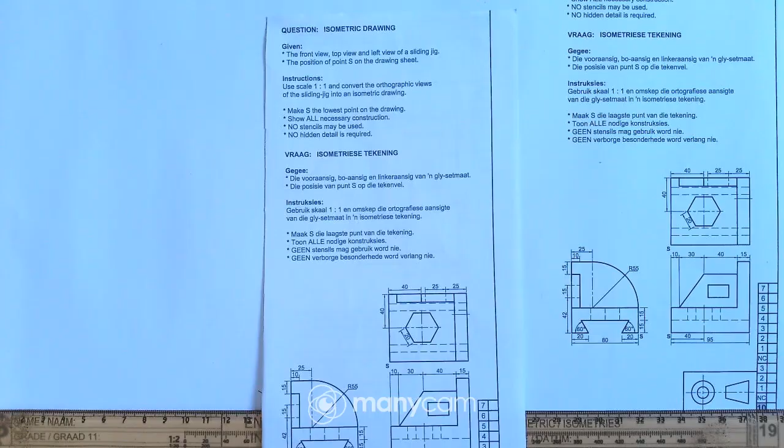In this video I'll answer one of the isometric drawing questions. I took this question from the grade 11 workbook EGD, page 19. As you can see, I have a small piece of paper there, the same as this information section here.

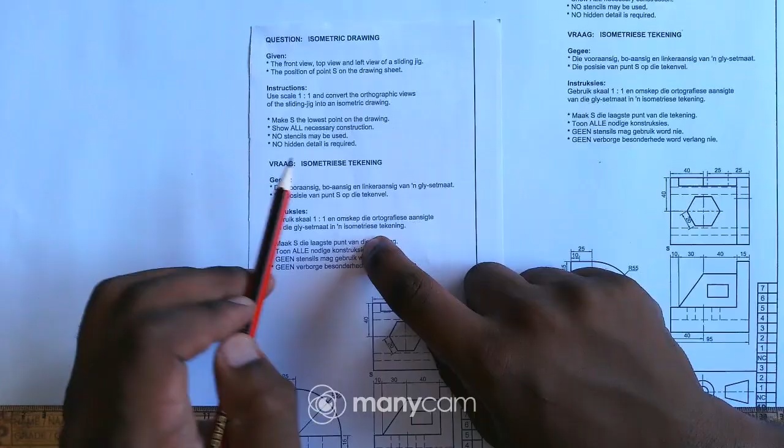I'll start by reading the instructions before I start with my isometric drawing. Given the front view, top view, and left view of a sliding jig, the position of point S on the drawing sheet. Use scale 1:1 and convert the orthographic views of the sliding jig into an isometric drawing. Make S the lowest point on the drawing. Show all necessary construction. No stencils may be used. No hidden detail is required.

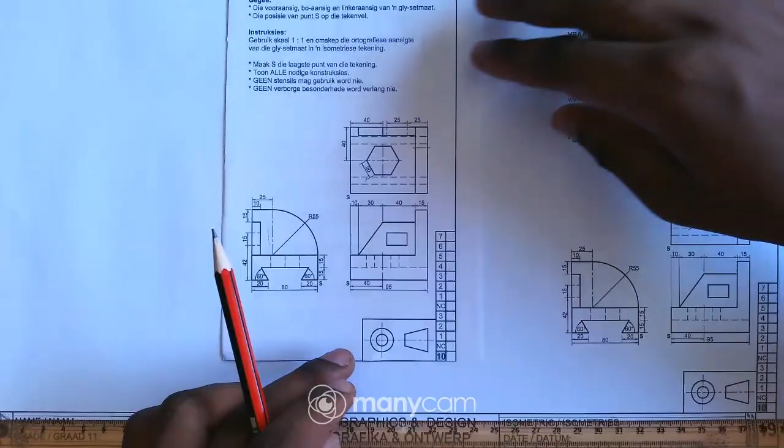As you can see here, we are given the top, front, and left view. So I will start off by drawing the isometric block. In order to draw the isometric block, I'll need the length, width, and height of the object. If you look at the three views, we are given the length, which is 95, and the width, which is 80. But what about the height?

So the height, as you can see from this space here, from here to there it's 30 - 15 plus 15 is 30. But now what about from here to that point there, up there? If you look at this arc, we are given the radius, which is 55. So from here to that line up there, it's 55. So it's 30 plus 55, which is 85. So it means the height of the object is 85.

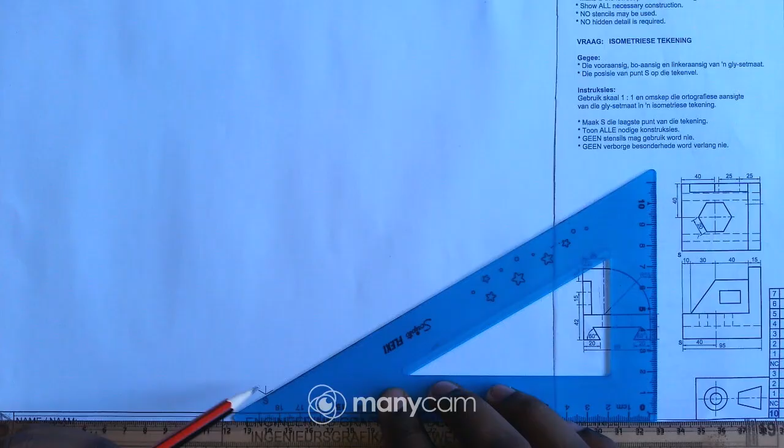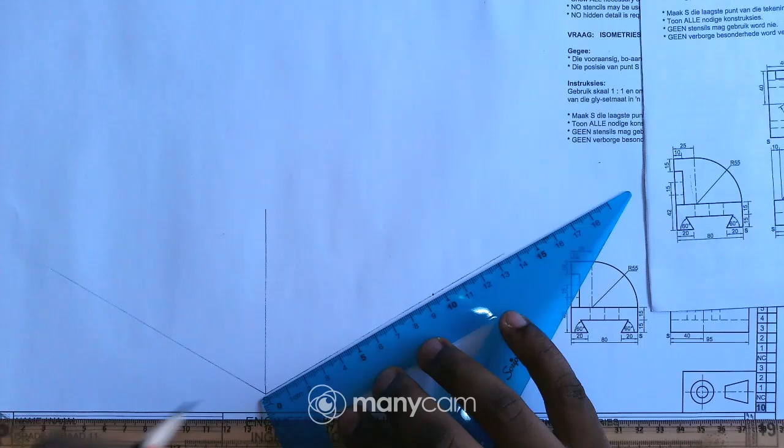So now I can start the isometric block. I'll take my 30 by 60 set square, draw a construction line, and even this side, and the vertical line right there, just like that. What's the length? Remember, it's 95. I'll mark off 95 right there, and the width is 80 to the left.

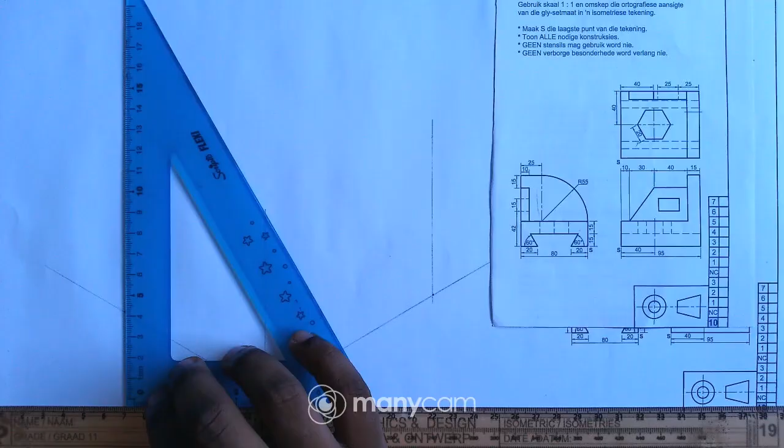And the height is 85, remember. So I'll mark off 85 on this line. From this point I can draw a vertical line and slide my set square to this other point right here. For this point, because this is the height, I have to project this line to the right, project this point again to the left, just like that. For the top part, I slide my set square to this point, draw a line, and on this side do the same thing, draw a line.

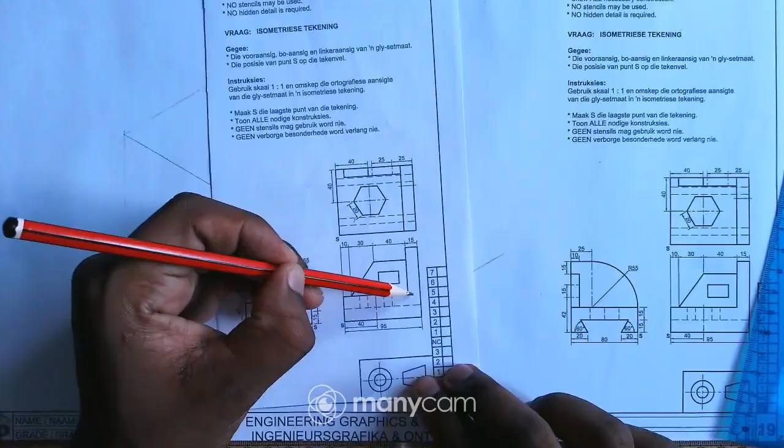So if you look at the screen, I have my isometric block - this section, three sections, this one, and the top section there. The arc obviously is right there from the left view, and when it comes to the front view, where's the arc? The arc is right there. So this is the section for this arc.

So if you look at the front view, obviously point S is right there. It means this part of the arc is far in - it's not right here on this line for point S. So obviously I have to measure this thickness of this section, this part.

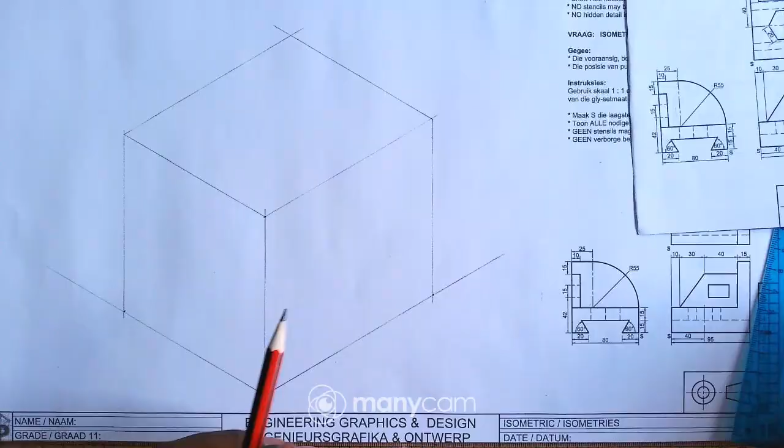So the thickness there, it's 15. I'll measure 15 from anywhere, maybe from this point or this point there. So I'll measure 15 there, then draw a vertical line like that, and draw the line again up there like this. Okay, so this is the thickness of the arc.

So now I want to get this point. If you look at the base, the height of the base - we are given from the left view - it's 30. So from here to there, it's 30. So I can mark off 30 from down here, going up, it's 30.

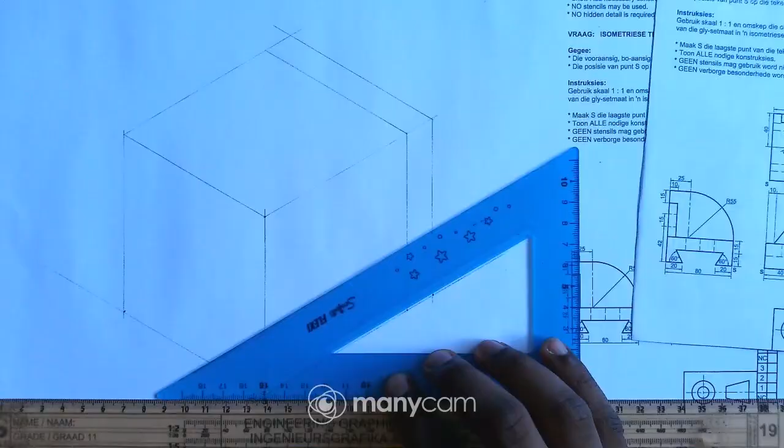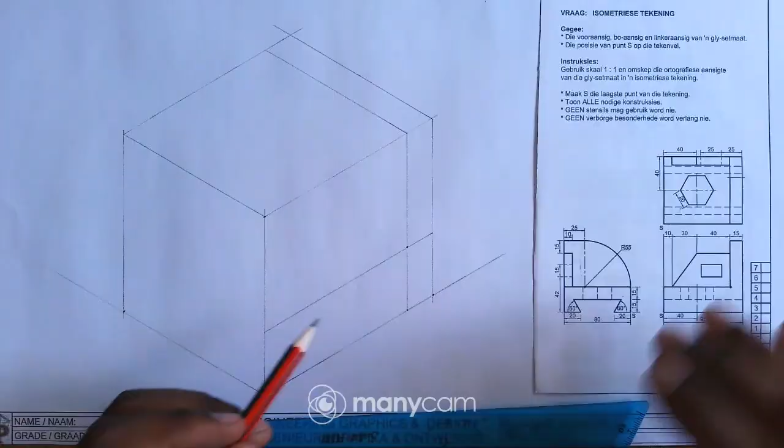Then I draw a line down to this line here. So now I have this point, it's right there - that's where the arc starts. For me to get this center point, I'll measure 55 from this point to the center point there. So obviously I have this point on my drawing, it's this one here. So I'll just draw a line using my 30 by 60 set square.

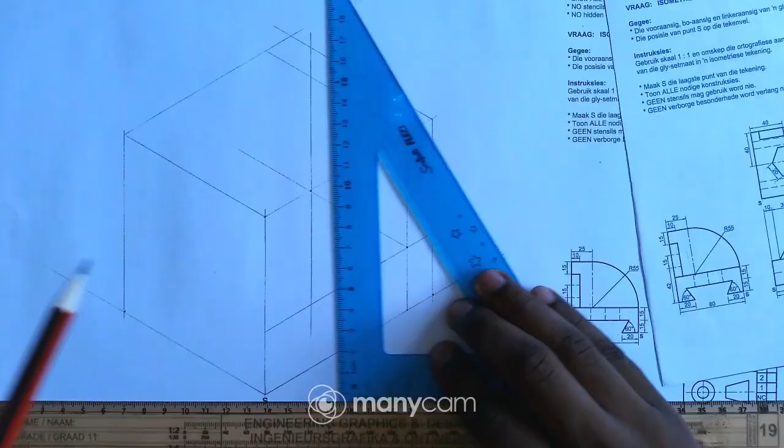And then I measure 55 because the radius is 55. So 55 is right there. It means this is the center point. It's that point right there. So I can just draw a vertical line there, like that. Okay, so obviously this arc, it's right there, somewhere there. I'll draw that arc somewhere there.

Okay, so now I'll have to draw the square so that I can do the constructions for this isometric arc there. Because this is the radius, obviously from here to there it's 55, and from here to there it's 55. So I can just measure. Let me just use my red pen for the square. So from this center point going down, I'll measure 55. I'll measure the radius right there.

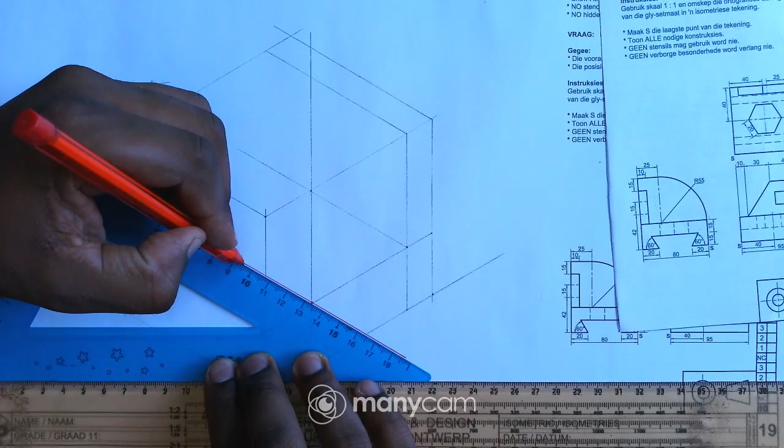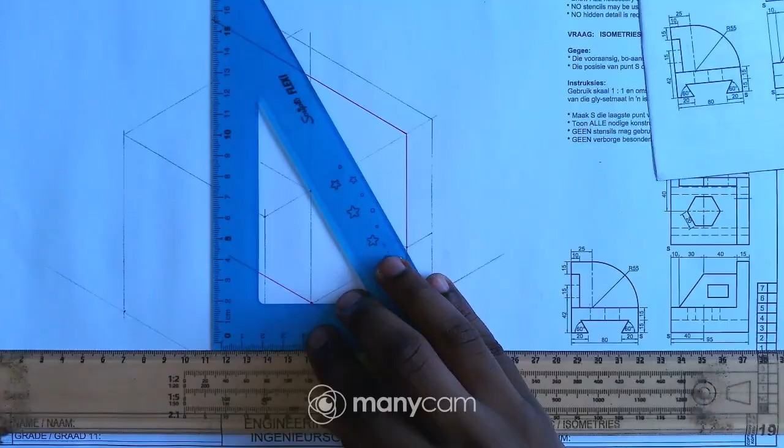So take note that I'm using my red pen to construct the isometric square, and then I'll also draw a vertical line there to this point. Okay, and then even up there, just draw a line going up, and then 55 is right there, and then I take it down. So this is the square. Let me just extend this line. So this is the square for an isometric circle.

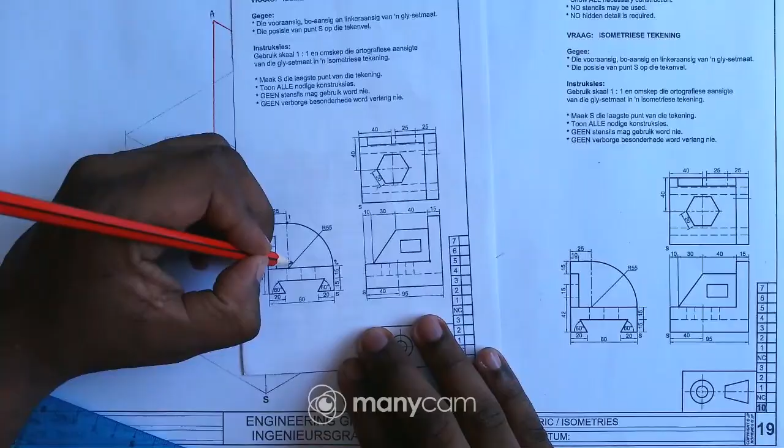So this is the center point. That point is right there, right? Okay. So I can say this is center O. This is A, B, C, D. So I can say this point is 1, this one is 2, and obviously this is the center point, which is O. So if you look at my square right there, where is 1? 1 is right there, 2 is there. Okay, I have center O right there.

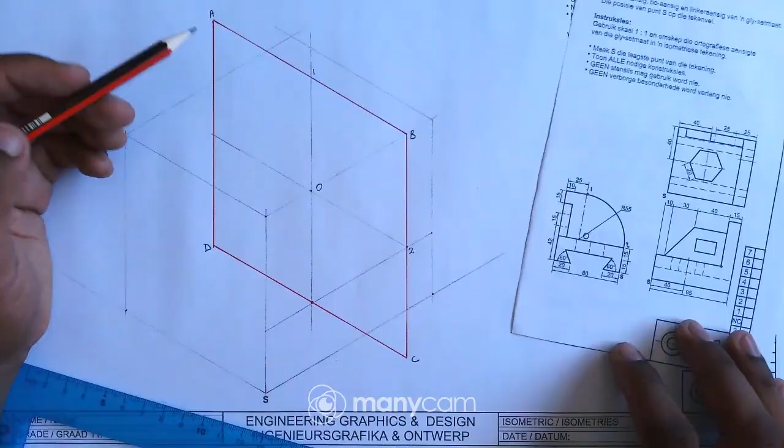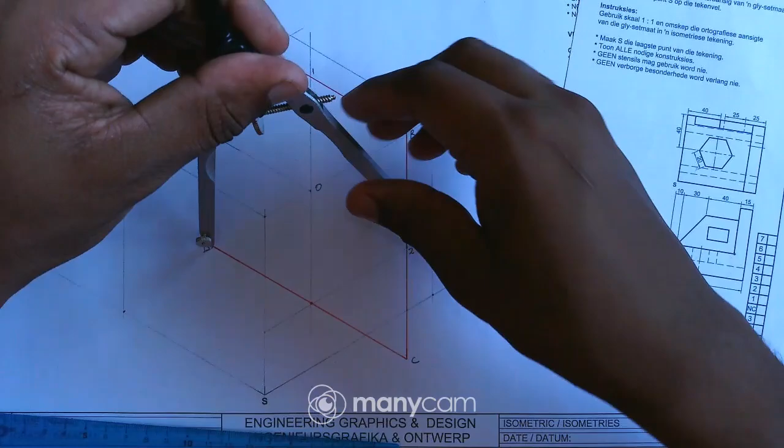The arc is from point 1 to point 2, so it means I'll have to draw an arc from this point to this point. So there is no need for me to make those constructions for an isometric circle. I'll just put my compass at point D and draw that arc there. So I'll just open my compass, put my compass at point D to point 1 right there, and then I'll have to draw. Sorry, my compass just moved. Just like that. Okay, so this is the arc.

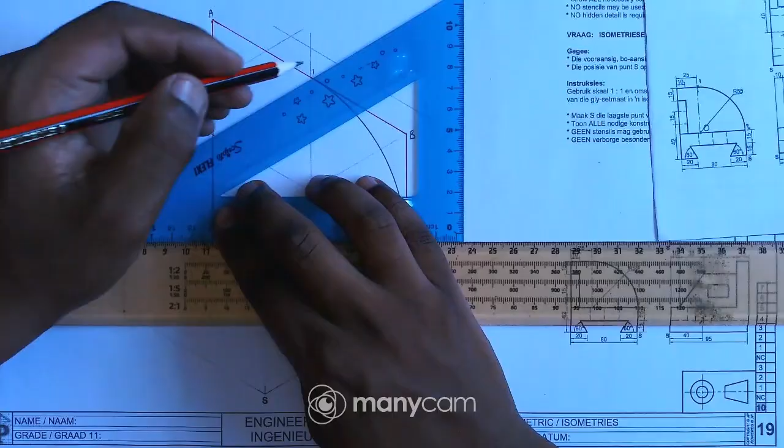So remember, we have this line and this line there. So it means this is the thickness of that section of the arc. So obviously it's 15, so it means I'll have to move this point D up, and I'll have to measure 15. We'll draw a line and measure 15 from point D. So 15 is right there, and I'll move point 1 up to that line. So now I have a point there, and for this one obviously it's right there.

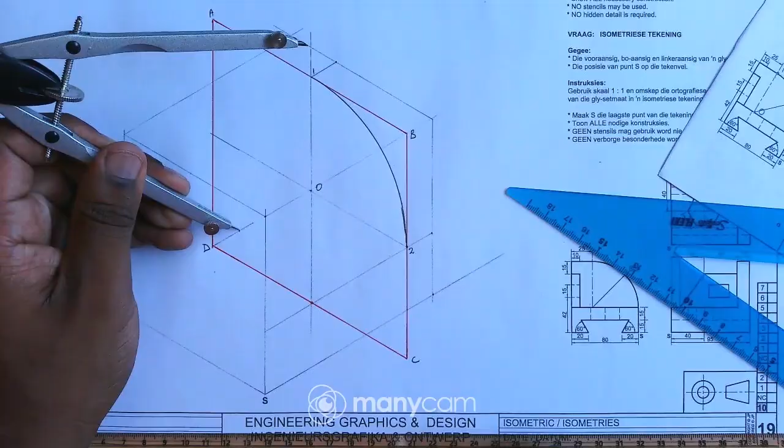So now I'll have to draw an arc again from this point to this point. It's this thickness of the section of this arc. So I'll just take my compass, put my compass at this point to that point up there, and draw an arc just like that. Okay, so I'm done with this arc. So now I can just proceed with my isometric drawing.

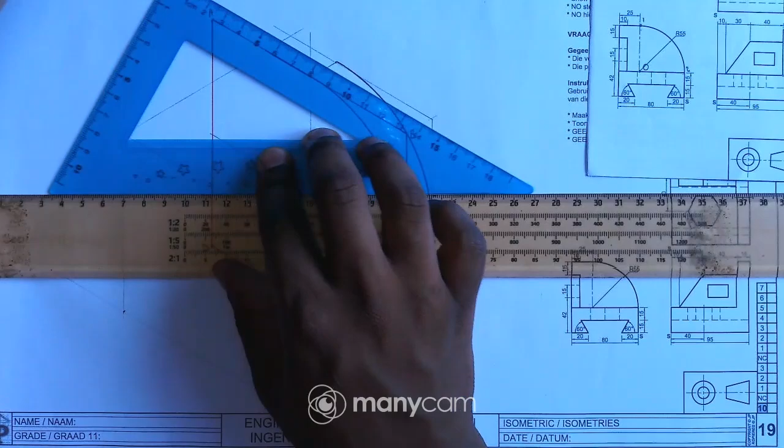So obviously if I look at my top view, you can see that there is this section. My arc ends there, so I can continue by drawing this rectangle up there from the top. So where is it? It's right there at the top. So I can just take my set square, draw an outline there, and even right there.

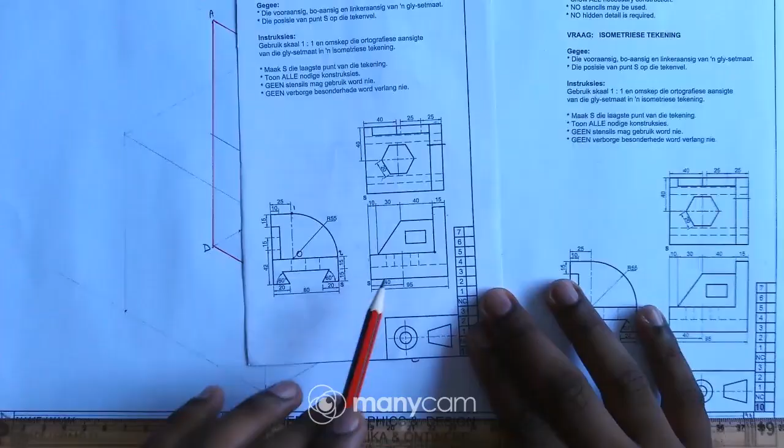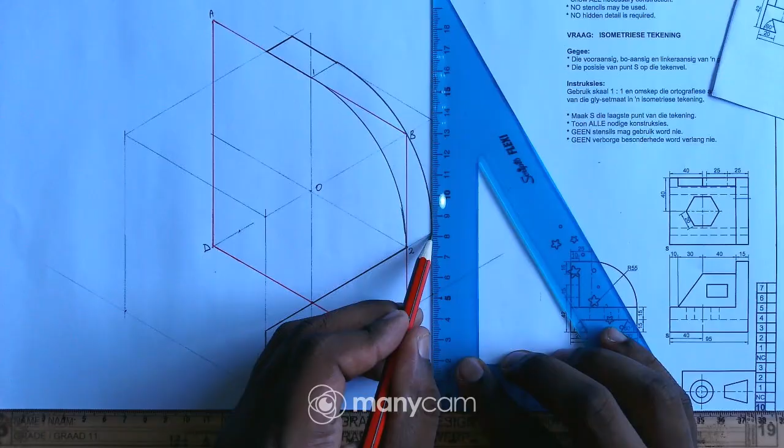Just like that. Okay, so now I can just draw this base part, and this is the front view. Where is point S? Point S is there. So from point S I just draw a line going up from here to there. It's 15. So I can just draw an outline there going up, and then join those 2 points from here to point 2 right there. And then I can just draw a vertical line there and right there. So this section here, it's this section right there.

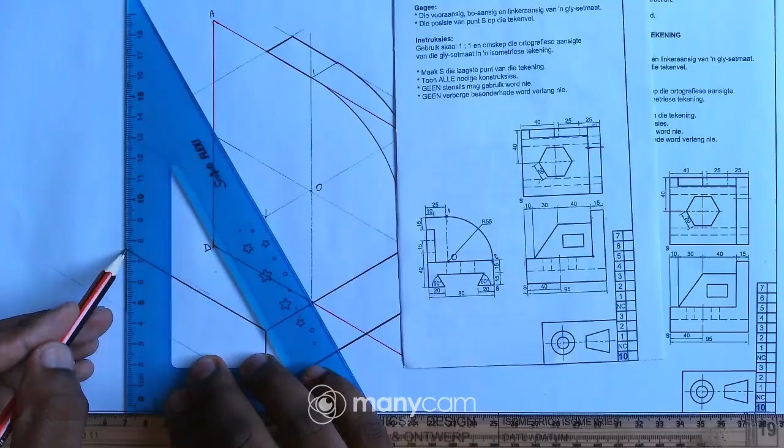Okay, that's fine. So now I can just project these 2 points to the left, so that I can draw this base on the left. As you can see, this point goes to that other point on that side, so I can just draw an outline going up there, and then draw a vertical line there. Good. But now if you look at this base, this side, you can see that there is this section here, and obviously we are given what? An angle there.

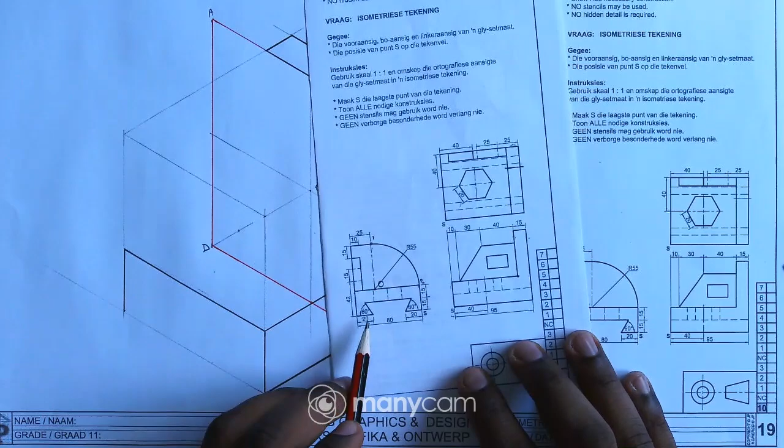The angle is 60. So are we given the distance from this point to this line? No, we are not given, but we are given this distance from this point to that point, and even the height from here. But we are not given the distance from this point to that point. It means now I will have to draw an auxiliary view for this section. Okay, that's not that difficult.

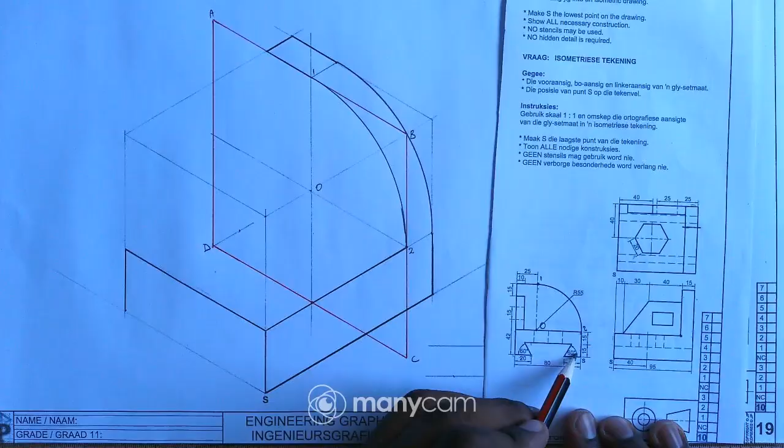I'll just draw a horizontal line just down here and mark a point and measure this 20 there. Okay, I'll measure 20 there, and then draw a vertical line, and that line I'll measure 15, so it's 15. Then I draw a horizontal line there. Okay, so now remember the angle here, it's 60, so I'll just take my set square, because this is a 30 by 60. I'll put my set square like this and draw a line there.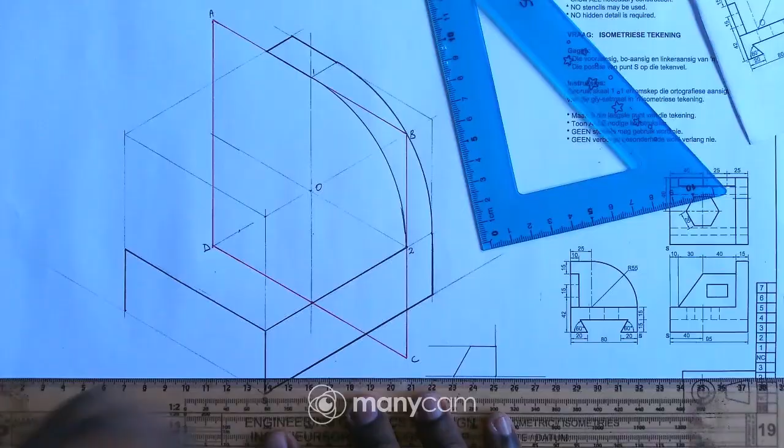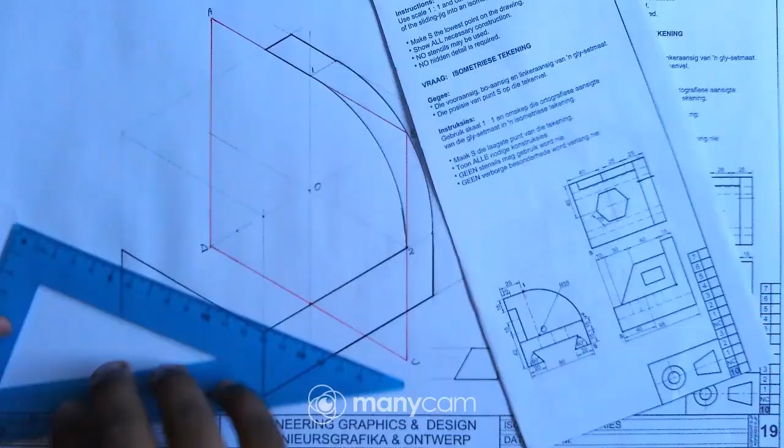Right, because you get marks for drawing this auxiliary view right here, so it's very important for you to draw the auxiliary view. So just make it dark just like that. Okay, so obviously now I can just measure this, because remember we were not given that distance, right? So I can measure that distance and mark it on my isometric drawing. But first, before I mark my point, I'll have to measure that 15 and draw a construction line going up like that.

Okay, and then now I can measure that distance there. It's 12, so I'll just measure 12 here, mark a point, and even up there I'll mark a point, I'll measure 12, just like that. Okay, and remember from here to there it's 20. I can just measure 20 from point S going to the left, and even from this point up there measure 20. So now I can just join these 2 points. Okay, so I can join those 2 points, can draw an outline, even right here, draw an outline.

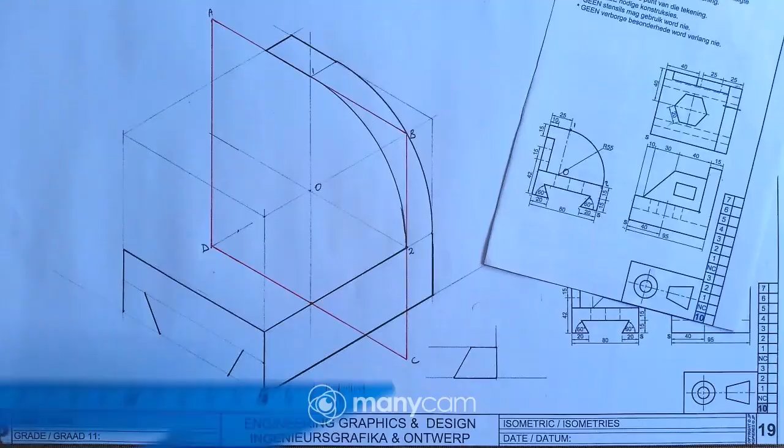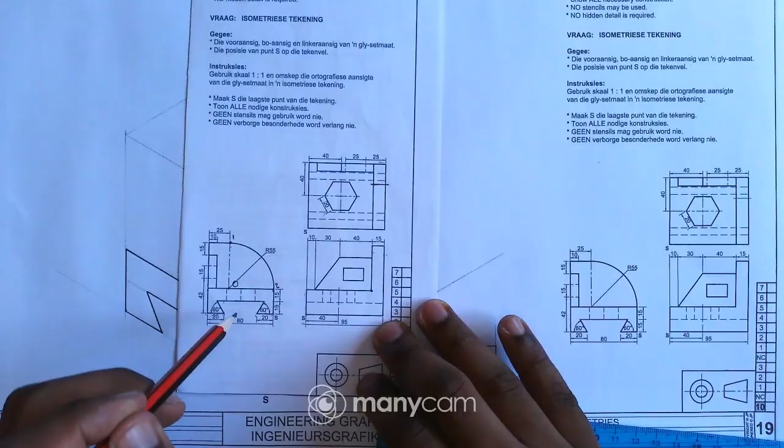Okay, and then join these 2 and those two, just like that, and draw this line. Okay, so obviously this is like a channel going in. As you can see here, we have some hidden detail. So what I can do here, I can just draw a line going in from this point right there up to this line, just like this. Okay, perfect. So now I can proceed to this section here.

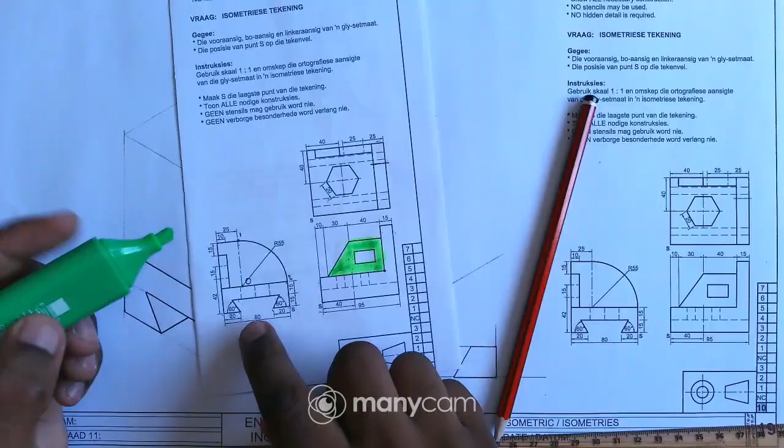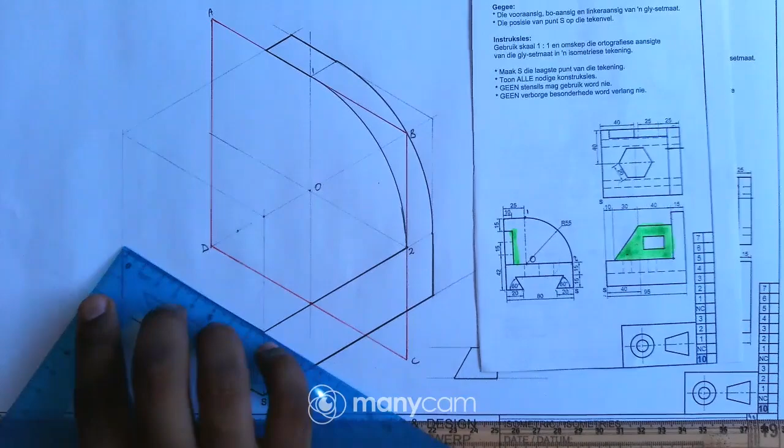So if I look at my left view, where's the surface? I'll just highlight the surface. Okay, so obviously I have to draw that surface. And where is the surface from the left view? The surface is right here on this line there, because obviously from the left view we can't see the surface, we can only see the edge of the surface. Okay, so if you can see, what's the thickness of this part here? We are given from this left view, it's 10, right? So obviously I can measure 10 here, so that I can draw that section.

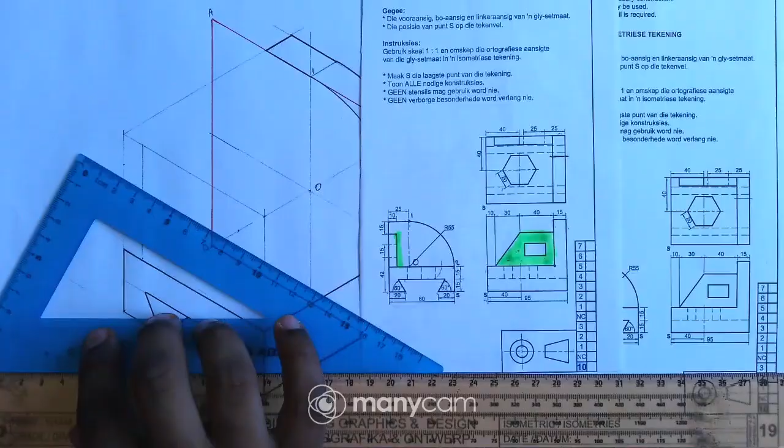So I can measure 10 right there, draw a vertical line, and then what's the height of this section? We are not given the height, but we are given that from the top point there going down it's 15. So I can measure 15 from up there going down right there. Okay, and then I can just draw a line there. Okay, so if you look at this rectangle, it's this one right there, right? I can just project those 2 points, this one up and this one up there.

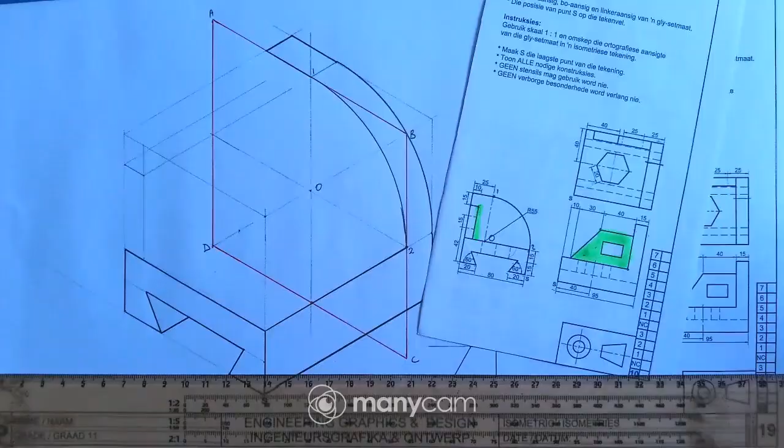And why? Because if you look at these 2 points, those 2 points are right there. But if you look at the front view, where are those 2 points? They are right there, right? Okay, so if you look at the measurements there, from this line going in it's 40, so it means that I can just measure 40 there. 40 is on that line there, so I can just draw an outline there. So this line, it's this line there.

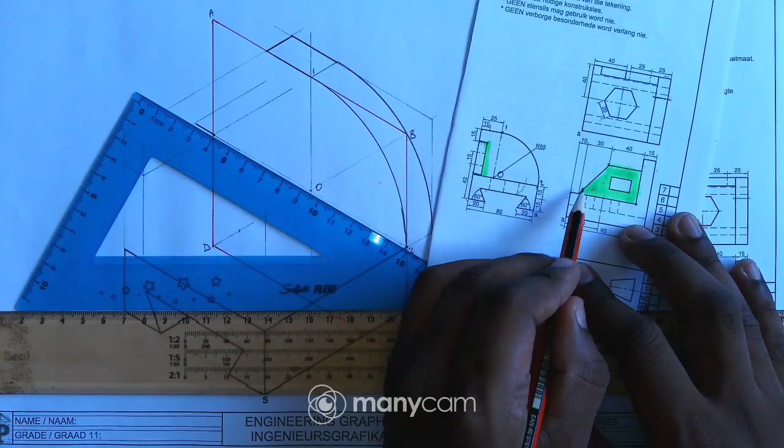Okay, so now what about this edge there? Where is it? It's right there. It means it goes in by 10 millimeters. So I can just draw this line there and measure 10 going in right there, and then just draw an outline there, just like this. And obviously it means I have these 4 points now, so obviously I can join those points. As you can see, from this point we have a line to this point, right? Okay, so I can just join those 2

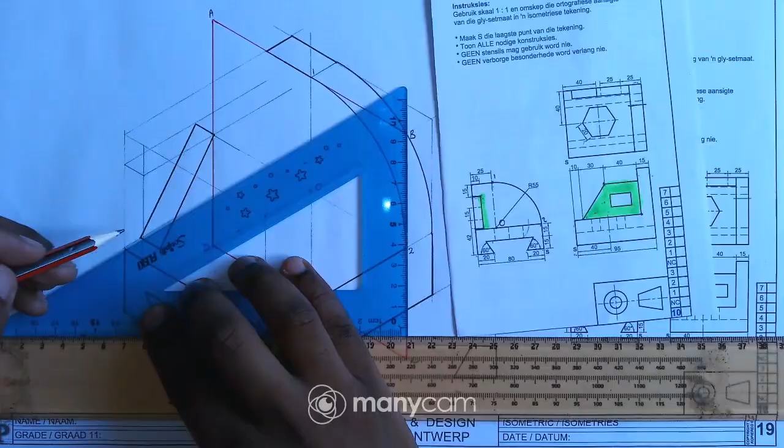right there, and even those 2, because as you can see it's a slanted surface, as you can see from the front. Okay, and then I can just draw a line there, just like that. Okay, so now if we look at the top view, I have these 4 points. Remember, it's these 4 there. Okay, from these 2 points, obviously this point and this point, it's this and that point there.

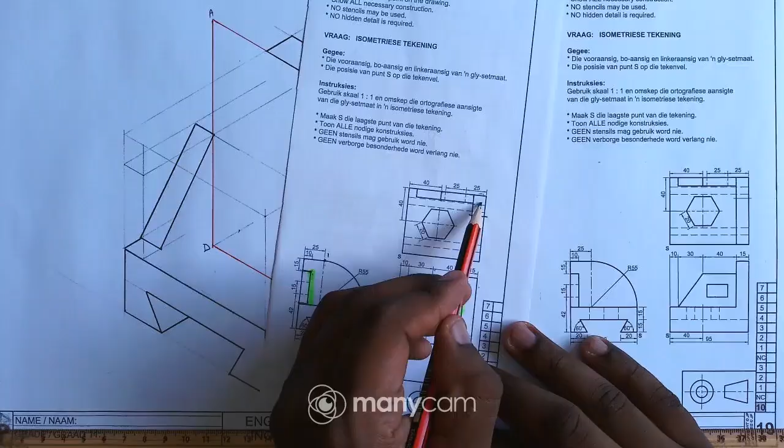So we have a line or 2 lines from those 2 points to this part of the object. So it means I can extend those 2 points there, and then I can take down that point vertically down. Why? Because if you look at the front view, obviously there is a vertical line there, so I can just draw a construction line there.

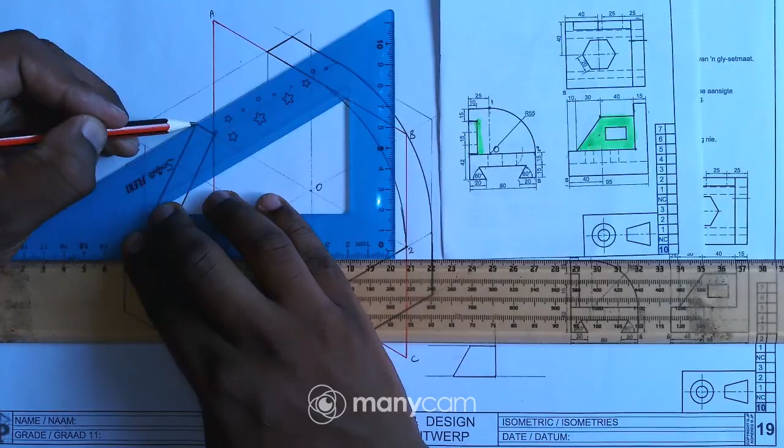Okay, and then when it comes to this point, I can just draw an outline up to that point, and then I can just draw an edge there like that, and then even this line, I can make it solid, then join those 2 points just like that. Okay, remember I'm trying to draw the surface, right?

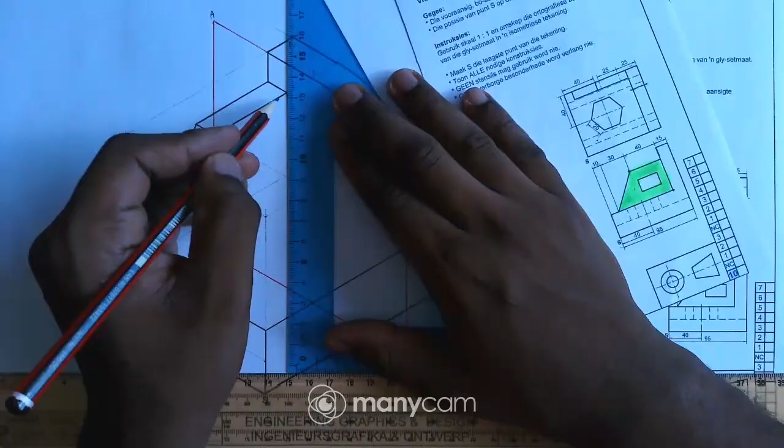Okay, so I do have this point, it's right there, and also this point, it's right there. So now from this point I can just draw a vertical line, light construction, and then from this point I can draw a 30-degree line going up just like that, and then I can just make the 2 lines solid. Right, okay, so I'm not done.

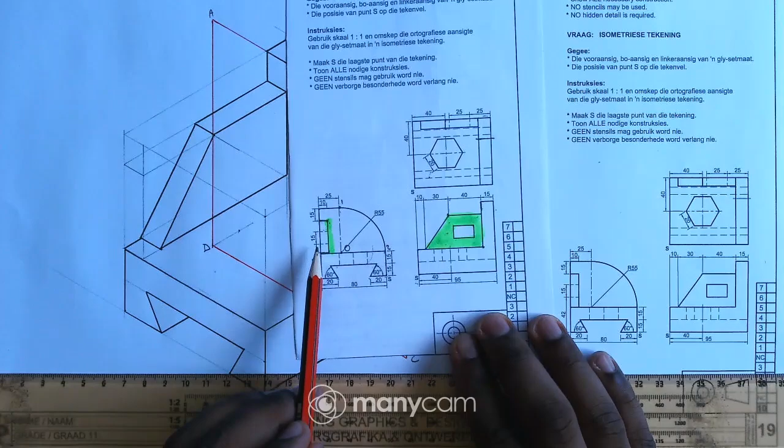Obviously there is this hole there, this rectangle. Obviously if you look at the left view, there is hidden detail there. These hidden detail lines indicate that this is a hole. So how are we going to get this rectangle? If you look at the top view, from this line going in, it's 40, and obviously from here to here it's 25.

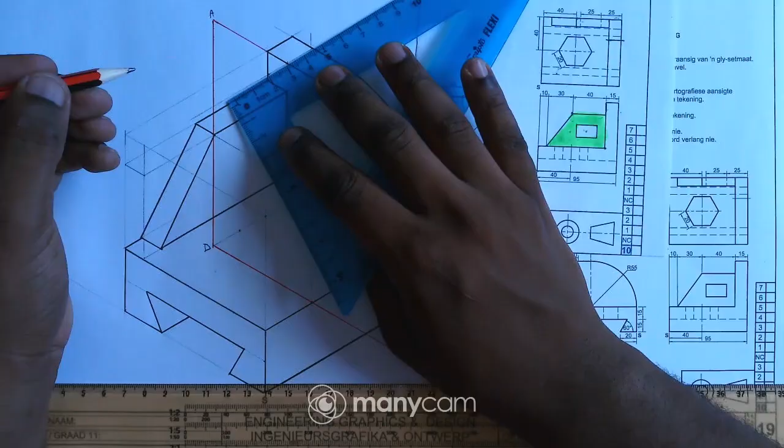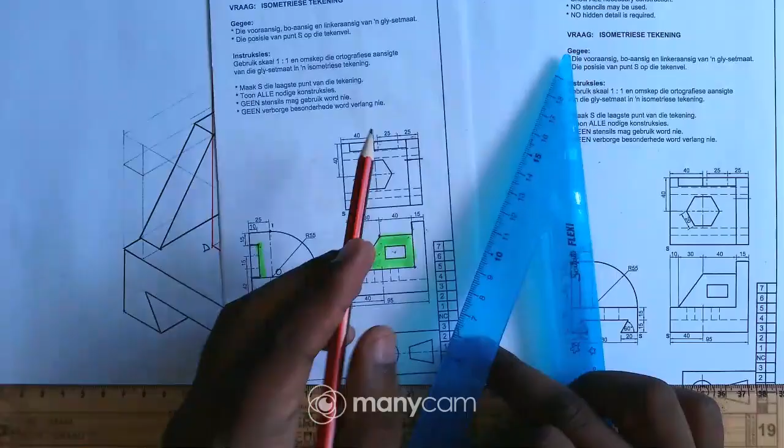Okay, what I can do is I can just project this line up to there and draw a line like this, right? So I'll measure 25 on this line and 50, so I can mark 25 right there, and then 25 again from the same point, and then from there I just draw 2 vertical lines going down like that, right? So I projected this line going up, and then from this point I've drawn a 30-degree line, so that I can measure the 25, this 25 and this 25.

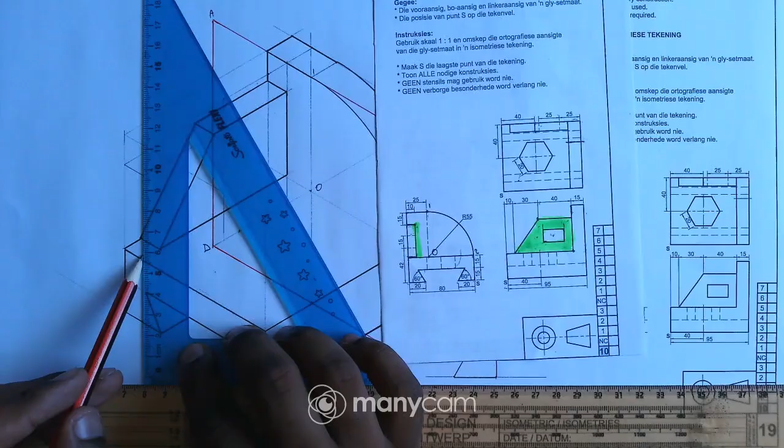Okay, so obviously I have these 2 lines, but now I must get these 2 horizontal lines. And if I look at my left view, from the base there going up to this line, it's 42, right? So what I can do is I can just draw a vertical line there, extend that line. I'll measure 42 from the very same line going up. 42 is right there, and then I'll just draw a line to the right.

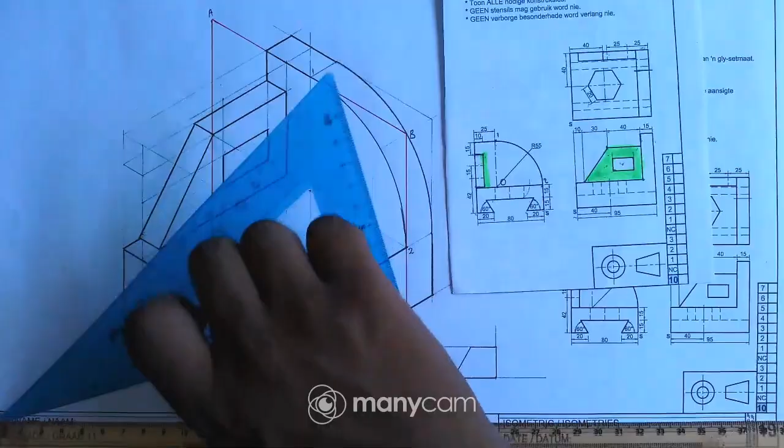Okay, from this point going up I will measure 15, so I'll measure 15 right there and draw a line. Automatically I have my rectangle there, so I can draw my rectangle solid like that. Okay, just like that. Okay, but remember, I'm not done.

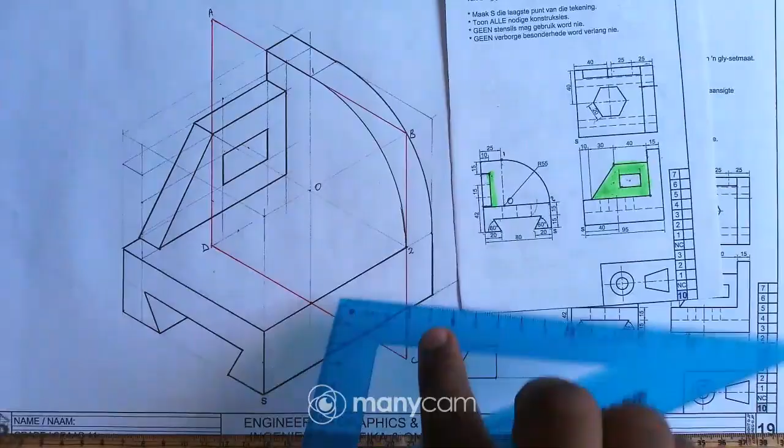As you can see, there is this corner there, and I can see the edge of this part, so I can just draw a light construction line. And remember, the thickness of this part is given, it's 10, so on that line I can measure 10 like this, mark there, and draw a line there, not construction, outline, a solid line like that, and a vertical line, and this edge there. Okay, so I'm done with this section.

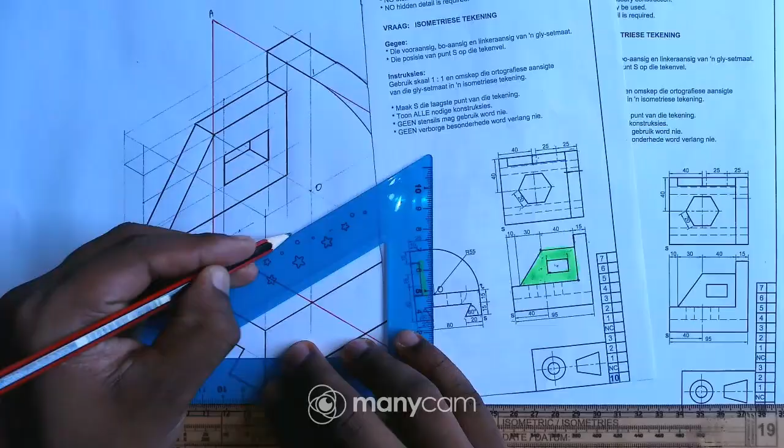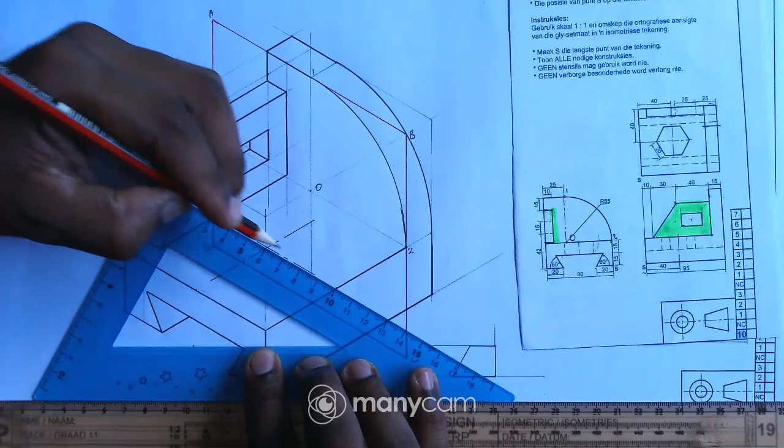Okay, for this hexagon here, let me just draw the center lines first. As you can see, from that corner to the center line it's 40. It means I will measure 40 going in from that point up there. Then I can just draw center lines right there. Okay, and then for this one it's 40 as well, so I'll measure 40 from this point going up there, and then draw the center line. Okay, so I do have my center lines for the shape.

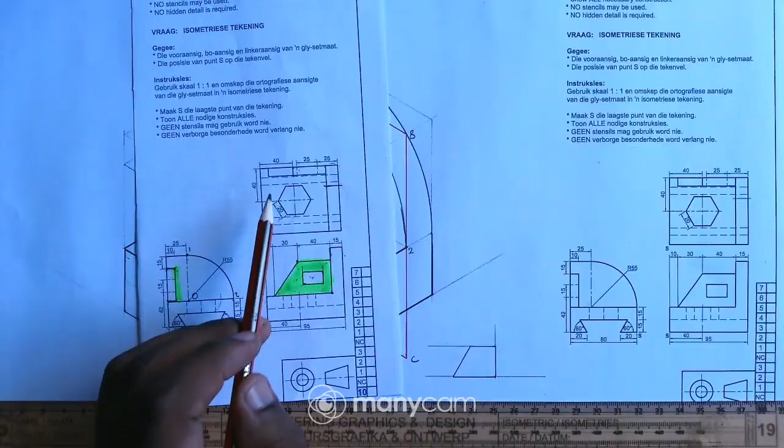So obviously if you are given a hexagon like this, it means that I'll have to draw an auxiliary view first, because I can't draw the hexagon on my isometric drawing directly. I'll have to draw the auxiliary view first. So obviously I have the center lines. I'll just draw my auxiliary view right here.

Let me just quickly draw the center lines like that. Okay, we are given that the side of the hexagon is 20. I can take my compass, measure 20 and draw a circle like that. It's 20, and then draw a circle.

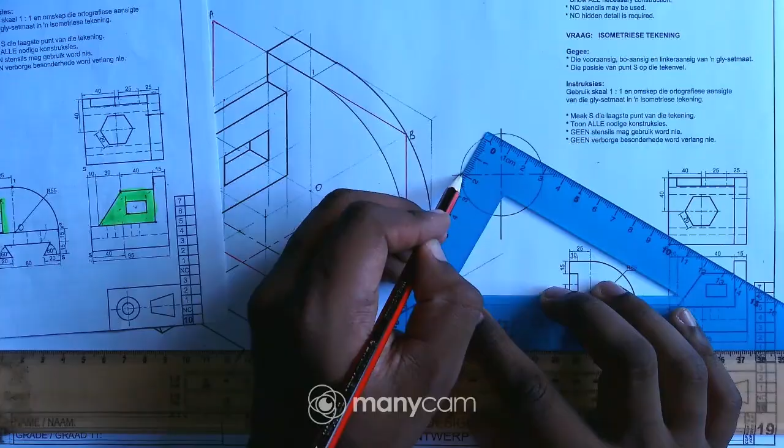Alright, okay, then from there I can just take my 30 by 60, draw a line there, a line from this point, put my set square like this, draw a line from this point going up, move it to this one right here like that, and then join those 2 points there.

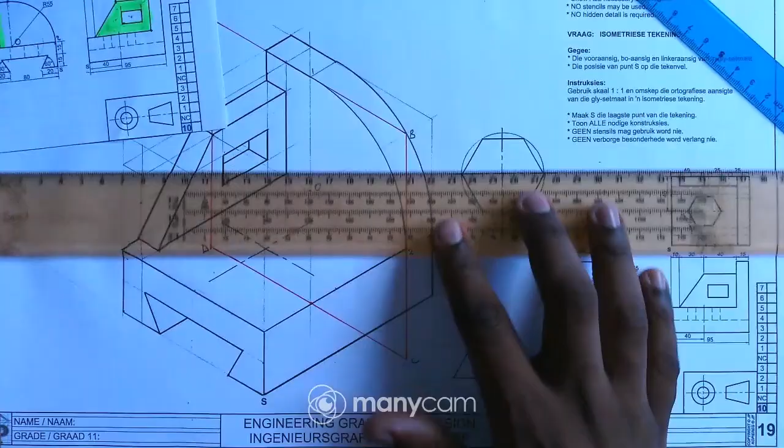Okay, and then from here I must just draw a square. So from this point I can just draw a vertical line, and this point a vertical line, and then on this base of the hexagon draw a horizontal line even right here. Okay, so as you can see I have 4 points now, so I can just label them. So it's 1, 2, 3, 4.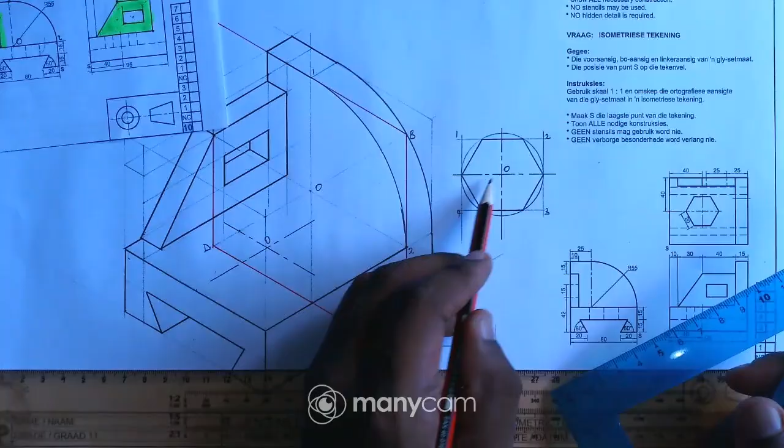So now I'll have to draw this square on my isometric drawing, right? Because remember I have the center here, so I can just say this is center O. Center O is right there. So okay, from center O to this point is what? It's 19. Okay, is it 19? It's 20. So I can just mark 20 there, and then obviously that side is going to be 40.

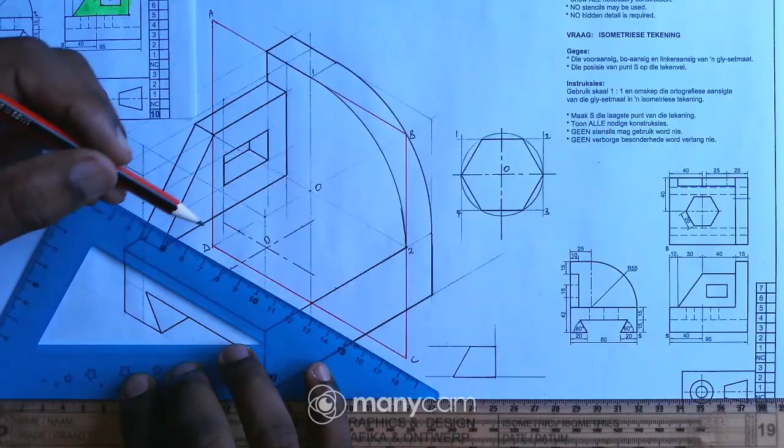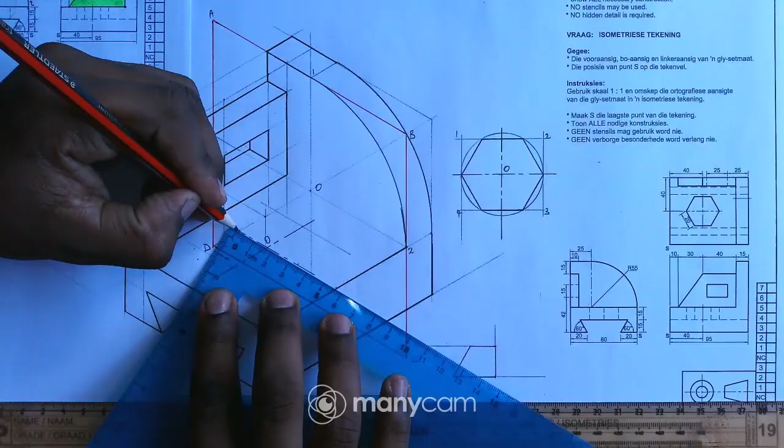And then draw lines there like that, just like that, and then I will measure from the center to this base. It's 15, 16, 17. Okay, so from the center to there it's 17, even up there I'll measure 17 from the center. It's right there.

And then draw a line here. Okay, I have point number 1 there, point number 2, point number 3, and point number 4. So now I can take my compass, measure the distance from point 1 to this point of the hexagon. So I can just measure the distance from 1 to that point. So obviously all these distances are equal, as you can see.

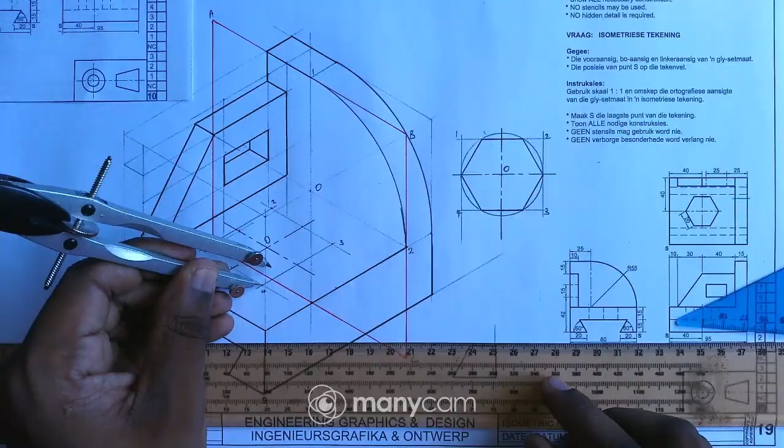So I'll put my compass at 1 and mark there at this line, and put my compass again at 4, mark there, and then put my compass at 2, mark there, and at point 3, mark there. So now I have my hexagon. I will have to just join the points. So obviously it's this point, that point, that point, that point, that point, and that point.

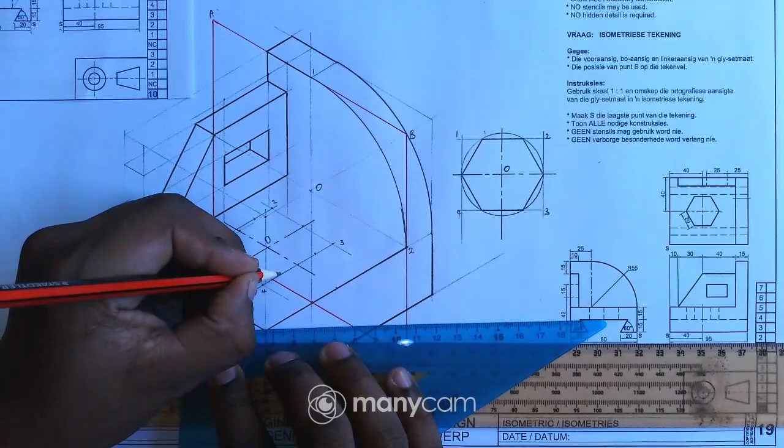So I can just join this one with this one as well, and that point there, then the point over there, and this one, and those points like that, right? So this is my isometric hexagon. It means I transferred this hexagon to my isometric. So if you look at this shape, it's not the same as this one. Why? Because this is an isometric drawing and this is the two-dimensional view of the hexagon.

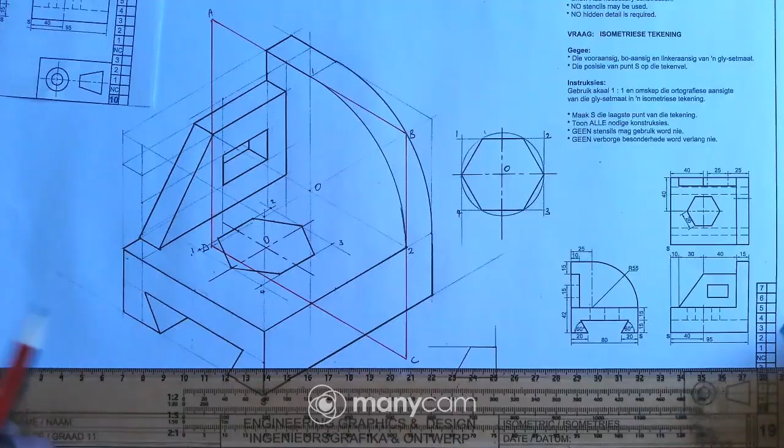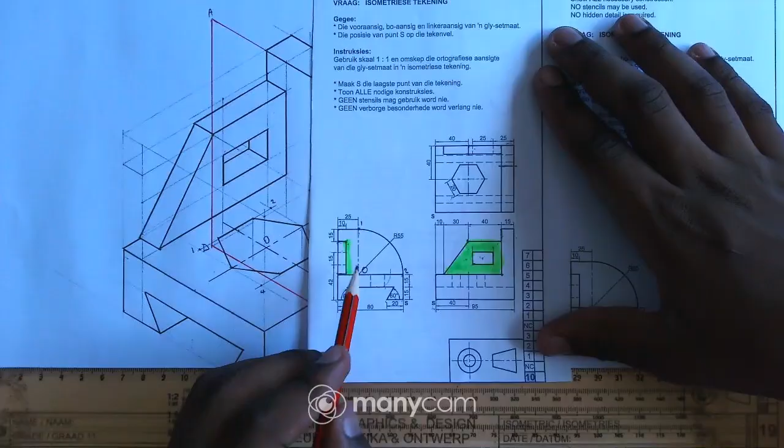And then now obviously I'll see an edge there and right there. So what I can do is I'll start by drawing two construction lines there, and I'll go back to my three views. Where's the hexagon from the left view? The hexagon is right there. It's these hidden details, and if you check, obviously this is a hole, right?

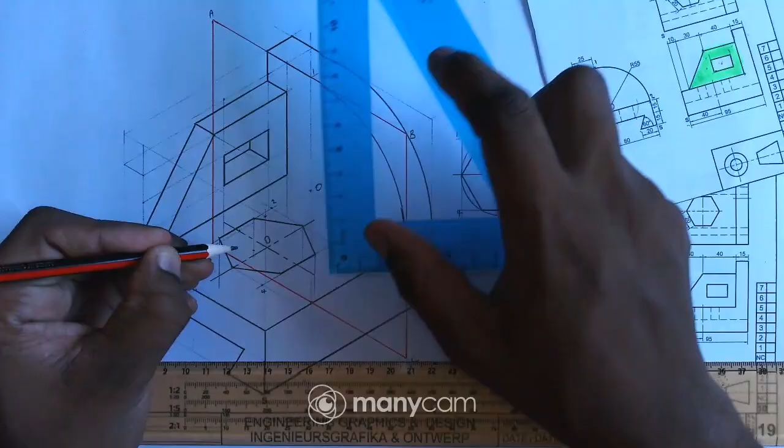So obviously the thickness of this part is 15, so I'll measure 15 on this line and this line, and I'll have to draw a vertical line as well at this point and this point, and then I'll measure 15 there. 15 is right there, and on this point 15 is right there, and here I'll measure 15 as well, and there I'll measure 15.

Why? Because from this point I'll have a line, so I'll just join those 2 points, but that line is from the point to this line of the hexagon, right? So from this point I'll have a line going this way, right? And then this point with this one, but the line will be from that point to this line of the hexagon. So I can't draw a line all the way to this point because this section is hidden. I can't see that section, it's hidden.

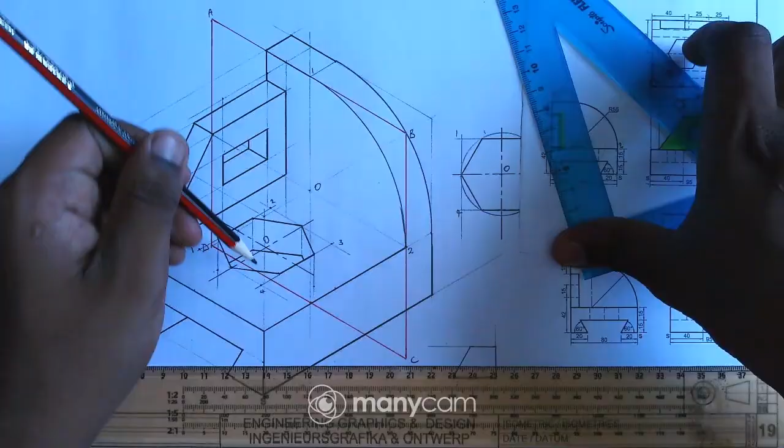And then I can just proceed and draw these edges there in solid. And then obviously this is the hole of the hexagon. And then remember I have this part. This part goes all the way under this section, so obviously I'll be able to see it right over there.

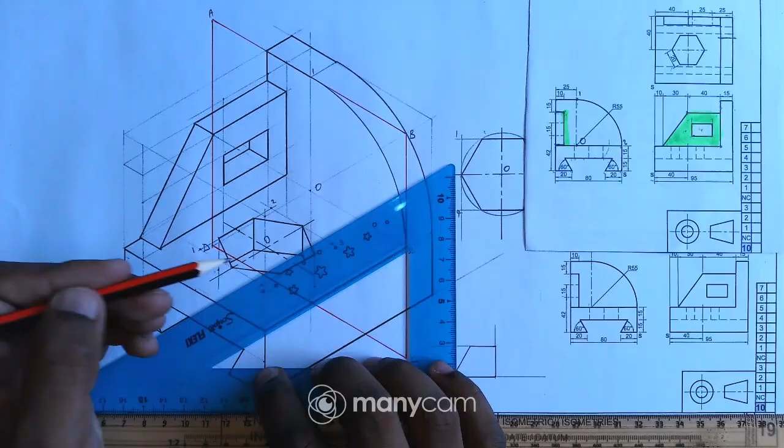So before I draw a solid line, I just want to measure. The length is 95, right? Remember, so 95, where is 95? It's right there. Okay, so it means I'll be able to see that edge there, from there up to there, just like that. Okay, forgot to draw this one. Yeah, right there.

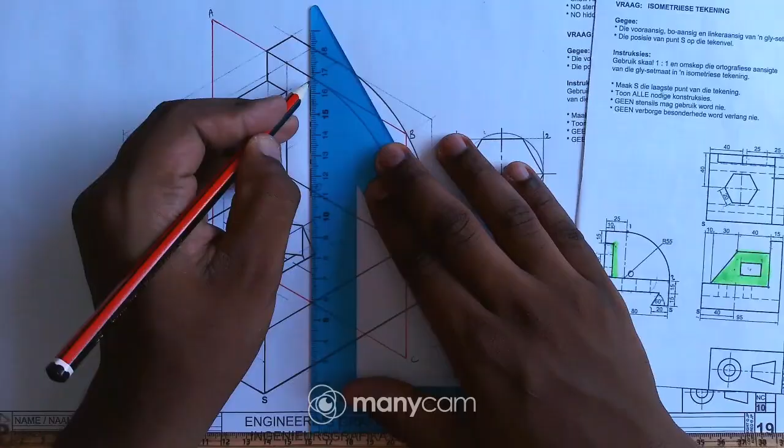So now I'll just add this center line there. So my center line will be right there, just like that. Okay, I have two auxiliary views, and then this section I took this measurement and I marked it there and even right there. And then for the hexagon, I was supposed to draw the hexagon first and then draw this square and then transfer the square on my isometric drawing and then plot the points. And then yeah, that's it.